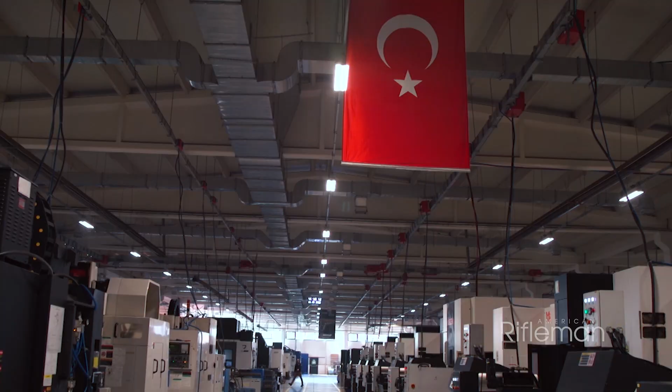Of course, we have the original drawings or the original pistols. We scan them, we establish 3D models, but we try to make it better. We try to make it flawless.

Our father showed the path. He wanted us to make that gun, and we wanted to grow the high power business. We have realized that there is a gap in that P35 production, and there are not many companies producing high powers.

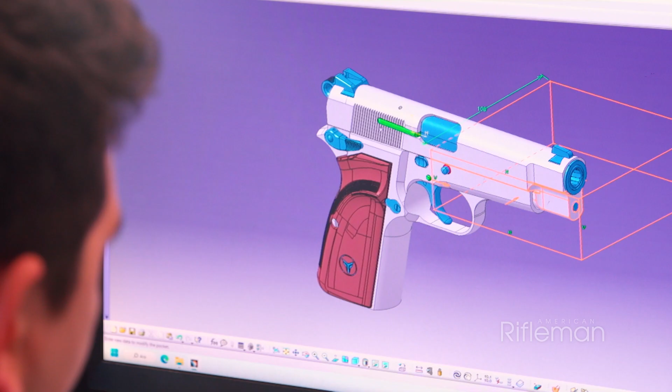First, we make the design. We draw all the parts separately, then we bring them together, and then we make the whole gun on the CAD.

After that, we see the positions, we see if anything is wrong on the parts, then we remodel them if needed. Then we do some analysis programs, like we put pressure at the beginning of the barrel, and we ask the program what would happen if we do it 10,000 times. It gives us an idea and shows us the weak points. Then we improve these parts and the model.

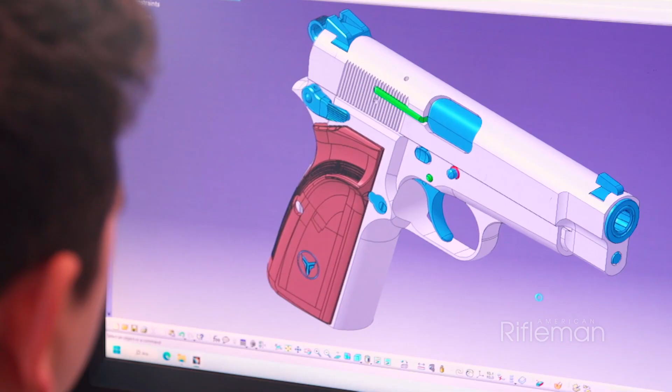After we finalize it, we develop in-house R&D models. We test them a lot. We make the endurance test, cold test, hot test, mud test, every test which a military pistol ever requested.

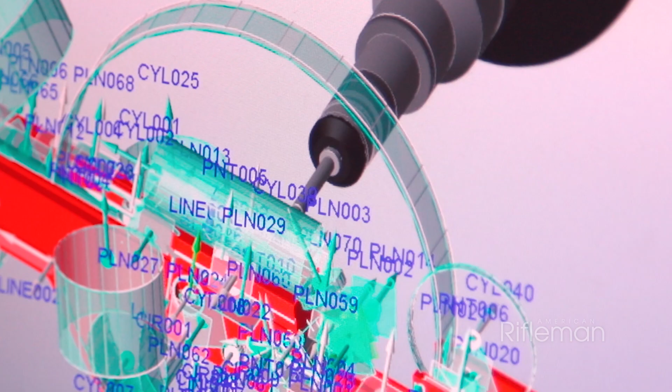We do the same things for this P35. After all testing is completed, we modify the extractor, the ejector, and even the hammer because of the biting, etc. We try to improve those areas.

In addition, because most pistol users are now using lasers and that kind of accessories, we add the Picatinny rail. Then we think like the 1911, we can extend the beaver tail. So we put all these ideas on the pistols, and we develop different models for the P35 Match, P35 PI. So we have a large product range for this model.

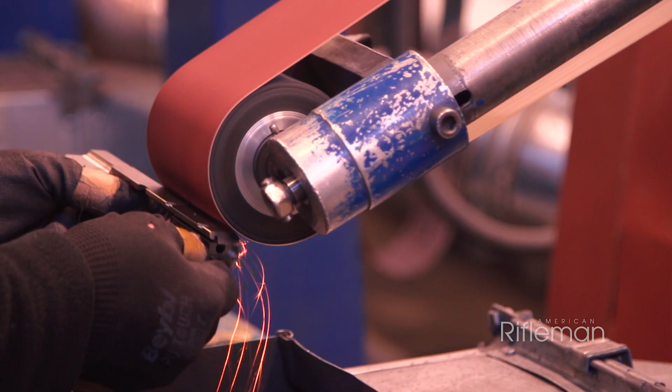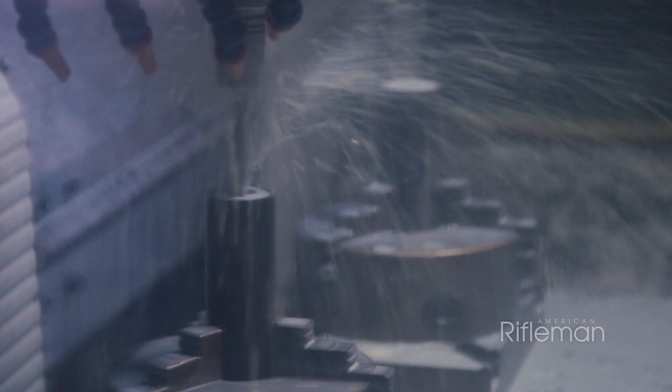I think that we've filled a niche for people that want a collector's item or a very traditional handgun, and it wasn't available at a reasonable price. And when it did come back with other companies, it was not what we're producing at Girsan. We're either producing a copy as designed and as produced, or a modernized version or tactical version.

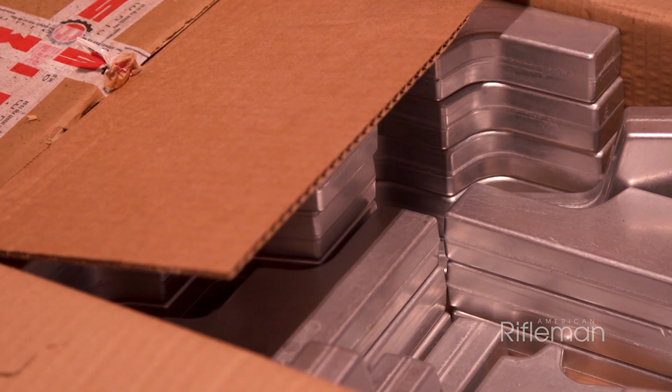We brought out the full size, we brought out what was called the detective, we call it the PI, and we will move into the aluminum frame high powers later in 2023. We'll bring out a standard configuration just like we did everywhere else, and then we'll bring out a more modernized tactical configuration.

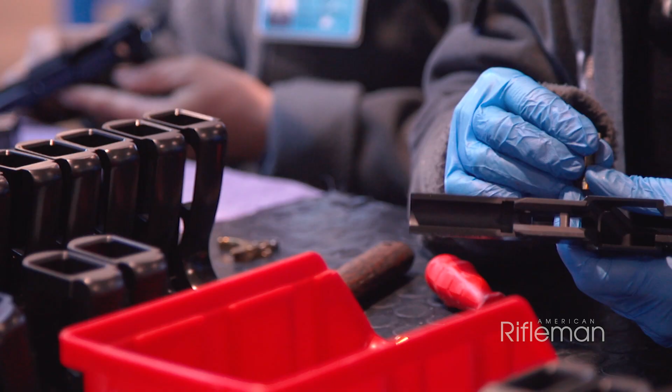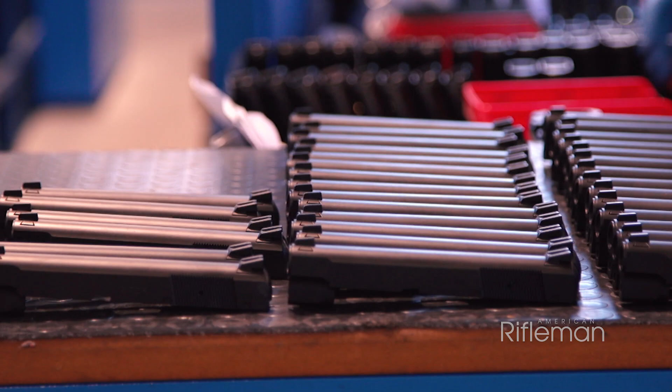The original guns we produced were copies as designed, as produced by John Browning's design. And then we went off into modernizing it. We added a beaver tail, a better trigger, nicer grips, different sights, ambi safeties, and we took it to a gun that you would take your old Browning and take it to a gunsmith for.

You'd pay $1,200 or $1,300 for that work, and we took all that to production. And today that gun retails around $700 with everything.

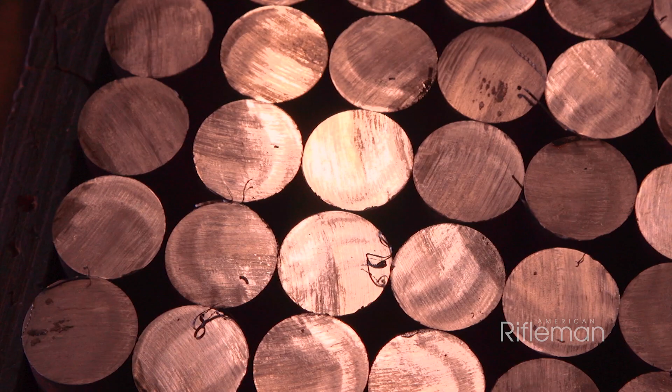For the P35, we are using high tensile steel alloys. First, starting with the gun drill operation, we are drilling the bore, and then we are honing it for very precise boring, and button rifling we are doing.

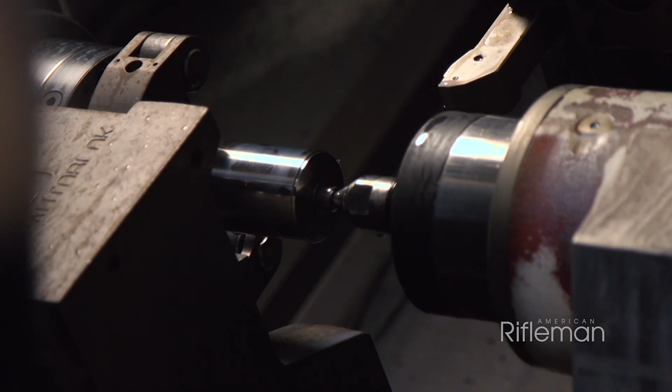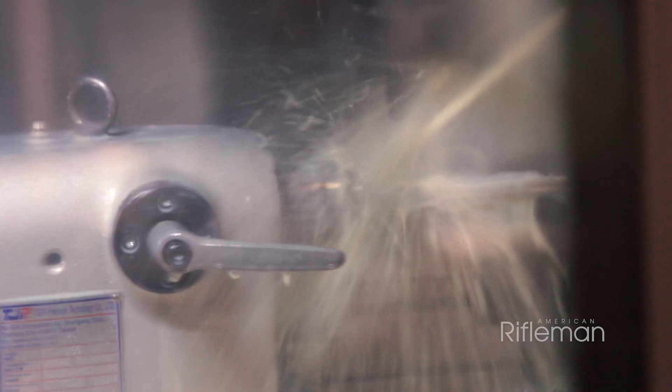After completing the bore, then we are starting the turning operations. We are using 3-axis and 4-axis CNC machines to complete the barrel lugs and chamber and the other areas. Then after, we are vacuum heat treating the barrels.

So today we've seen a decrease from our point of view of polymer handguns to an increase in metal frame guns. I think it's just truly market penetration on polymer guns. There's every flavor, every configuration that anybody can conceive of today in polymer guns. There'll probably be newer designs come out later, but today the polymer market I think is saturated.

So now you're seeing people who collect or want to have more than one handgun, you're seeing them go to metal frames.

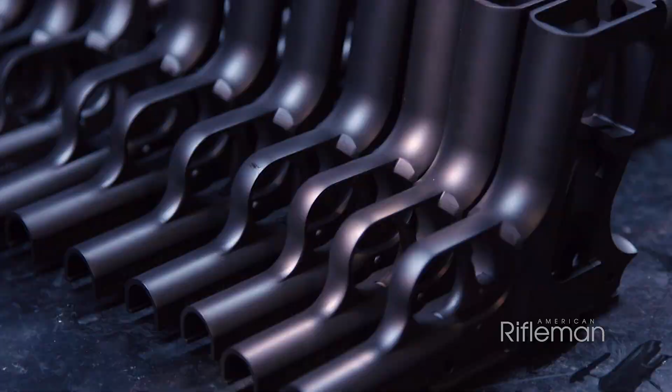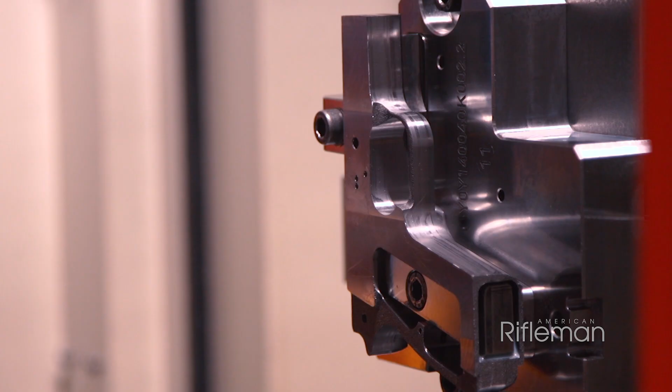For the P35, MCP35 Girsan, we are using the forged steel frame. Also, we have a forged aluminum frame for the lightweight models we will have. Both of the forged frames are machined, and almost 95% of the materials are machined.

After completing the frame, if it is aluminum, we have anodizing operations and other surface treatment operations. For the steel, we are also coating them and then painting them.

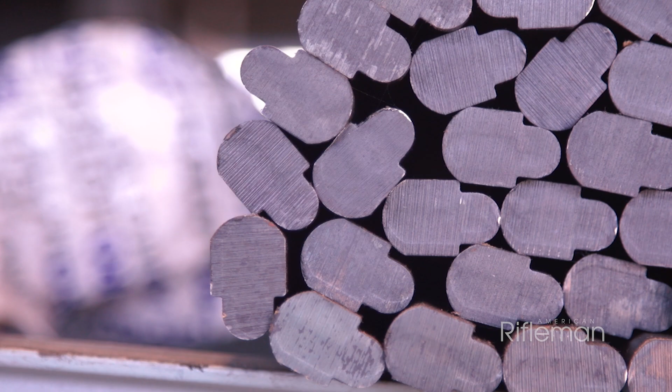The slide raw material is a high tensile strength steel alloy. It is a cold drawn material. We are using 4-axis high-tech CNCs to machine them. Also, we have some broaching operations, and after heat treatment, we have surface finishing operations.

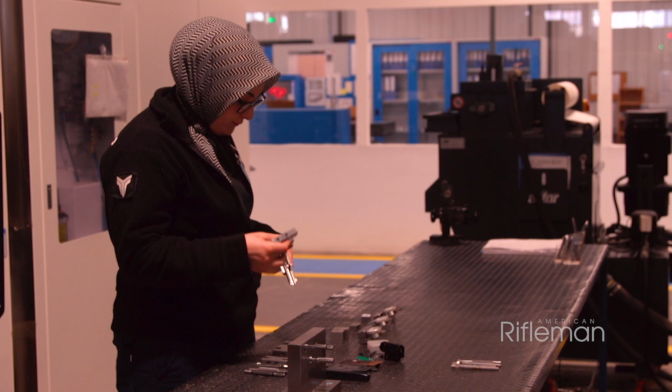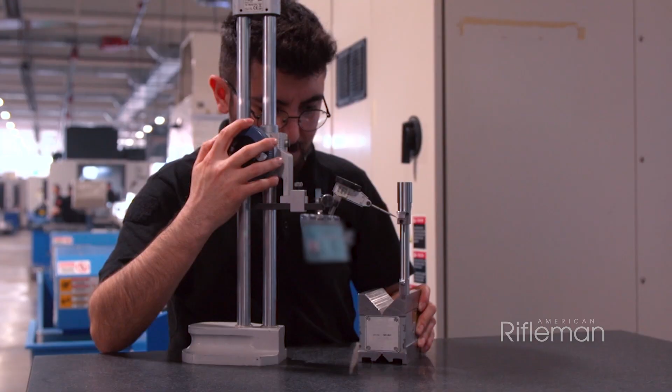The quality is very critical for us because our products are used by the police, military, and even civilian members are trusting these pistols. So we want to ensure that they can trust our pistols. Because of that, all operators are responsible for quality, not only the quality control team.

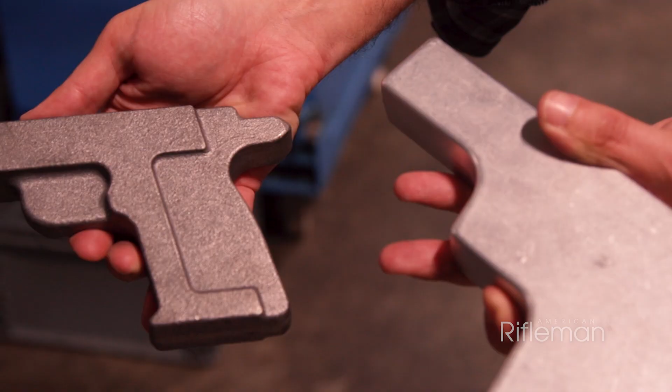So everybody is checking their parts and components after they do their jobs, and they have necessary gauges and receiving gauges. They have all types of inspection devices to verify the job is done properly.

In addition to this, the quality control team makes over inspections. So every part, I can say, is verified. Every part measured twice before coming to assembly or the next operations.

We've been in the business for 30 years and the procedure was never easy. To reach that point, we worked hard. We wanted to produce guns that have been legendary in the past, such as the 1911 and Hi-Power, because as all of us know, legends never die.